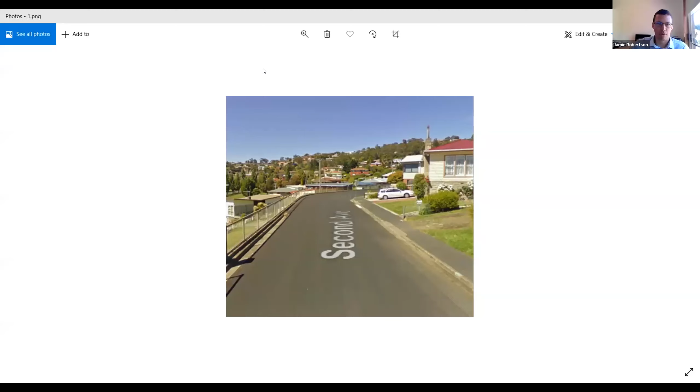I hope you can all see a photo there. Yep, that's good - you might want to zoom in a little bit there for us, Jamie. Yep, here we have 2nd Avenue in West Moonah.

We have a retaining wall here, Emily tells us, and there's about a 5-metre drop beyond that to a service road. There was an incident where a taxi driver was looking at his GPS and didn't take the bend, and went straight off. So Emily's question is, would you put in a pedestrian barrier or a road safety barrier?

I would suggest installing a road safety barrier here, which would serve the two purposes of containing vehicles and also highlighting the presence of that drop for pedestrians.

If you did put in a road safety barrier, it's going to need to be one with a bolt-down post, or it would need to be bolted to the side of that retaining wall. I'd suggest you would want to use a strong post guard fence system.

We've talked about proprietary and public domain guard fence products. Sometimes you might hear the terms strong post and weak post. The proprietary products are weak post systems, so the posts bend readily on impact.

Here, because of the relatively low speeds, we could get away with a semi-rigid system, a strong post system, which we could bolt down.

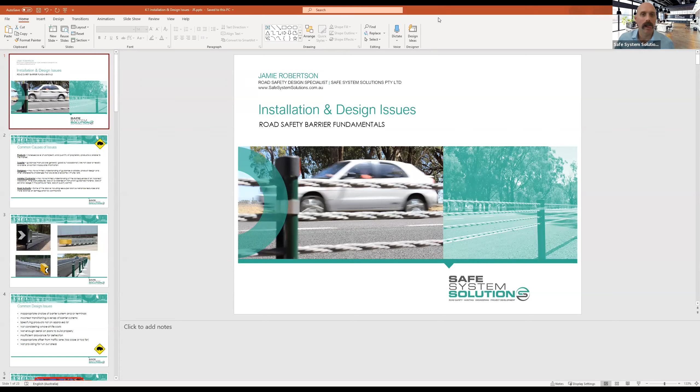Okay, yep, we're nearly there. Yeah, no, we're seeing it now. That's good. I got the right screen showing there, Ken. Perfect, Jamie, looking good, thank you.

So in the previous session, we talked a lot about the basics of design and the desirable things that we like to do in barrier design. In this session, we'll show you a lot of real world examples and situations where it's just not quite possible to get all those desirable things in place, and we have to make compromises.

There are a range of causes of the issues we encounter with barrier design and installation. Some relate to the products being used, particularly the newer proprietary products have a high number of parts and are quite complex to put together. Especially when a new product comes onto the market, we do see a lot of installation issues. The suppliers can perhaps take a little blame for that, especially in the early days of a particular product, their guidance may not be as thorough as it needs to be. These days though, we do see some pretty good product manuals available and even videos and the like to help installers install these products.

Designers sometimes may not understand the ins and outs of the products they're designing with. It does happen that designs are prepared without a designer visiting a site. There might be a desire to get a particular offset or use a particular flexible product, and I've seen it too many times where designs have been put on paper and a designer hasn't verified that it can actually work on site. So that really is the key first step to any barrier design.

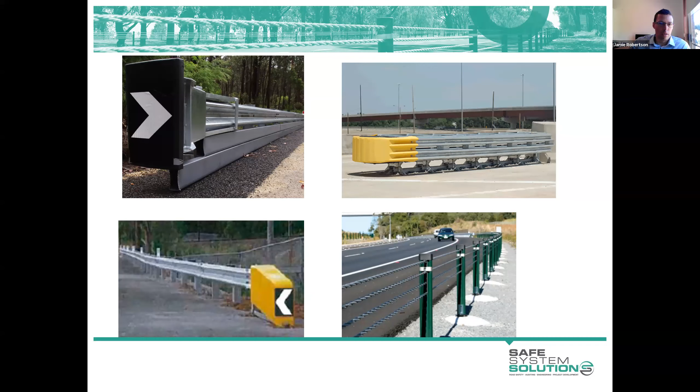Common design issues include inappropriate choice of barrier system. It might be that we have a desire to provide a flexible system, but we just don't have the luxury of the space to do that on site.

I won't read through those, I have photos of each of those things coming up shortly.

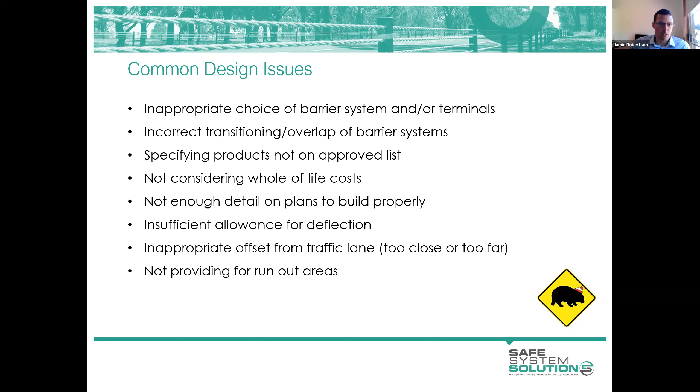Just on that one, sorry, getting that sort of run out area and the like could be a challenge. What are your thoughts there?

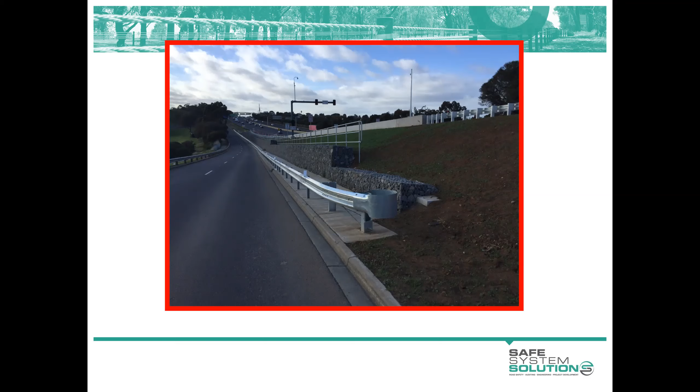Following up on that, Jamie, of the two methods of calculating length of need, the run out and the angle of departure method, which one's going to give us longer from that other side? The angle of departure method is going to give you a longer length, particularly at higher speeds. At lower speeds, the difference is not so great. I did mention that the run out length numbers have reduced significantly, so it generally gives us quite a bit shorter lengths, especially on those departure ends. Thank you.

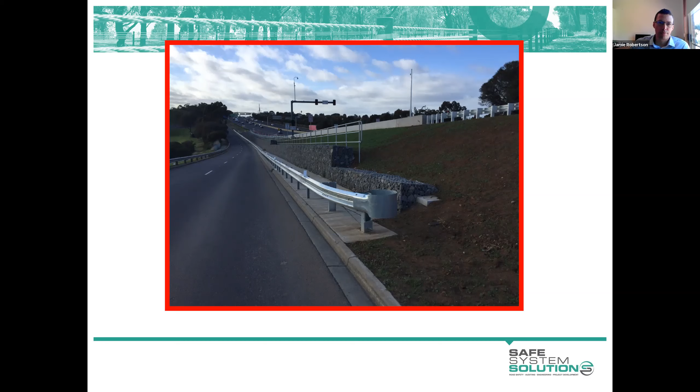I'm going to continue on that, because that's a question Lachlan came up with. Actually, Lachlan's got his hand up, so this is perfect. Pop that hand up again, Lachlan, because I'm going to let you ask your questions directly to Jamie.

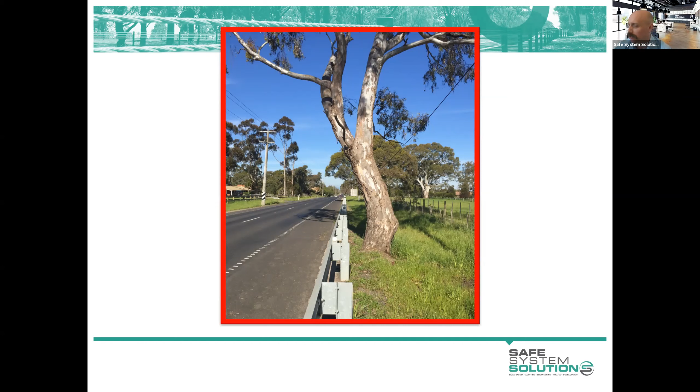Here we have a type B guard fence again, but it's located quite a long way from the edge of the traffic lane. It's beyond that 6 metres, which is now our desirable maximum offset. Between the edge of the traffic lane we've got curb, a batter slope which is nice and flat, probably drivable. Then we've got a table drain in front of the barrier and a change in grade. It's likely to affect a vehicle's trajectory before it hits that barrier. We have an increase in rollover risk because of the offset of the barrier from the edge of the road. So going forward, the preferred approach would be to locate your barrier somewhere up here.

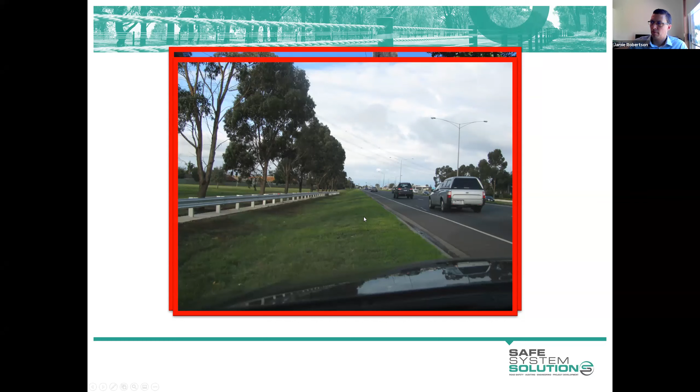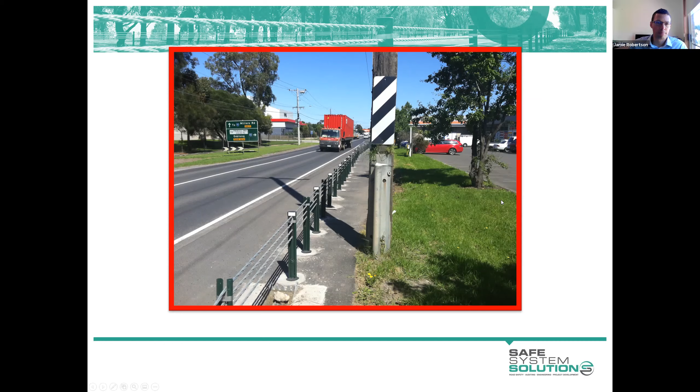Here we have a guard fence at the roadside that's shielding some of the trees you can see. There are certainly plenty of others that are exposed to errant vehicles. We certainly don't have the run out area that we'd like - our 18 metres by 6 metres in this area. You might notice we have a cut batter to the left of the image that runs out just before the start of the barrier. This is a common situation where we have a barrier start at the transition from cut to fill.

Desirably, this barrier would extend closer towards us to somewhere around here, but we perhaps can't extend it too much further because of this cut batter. But if it did extend to somewhere like here, it would shield a lot more of those trees, and we'd have a nicer run out area. Perhaps it's started where it has to provide a maintenance access point at this area here.

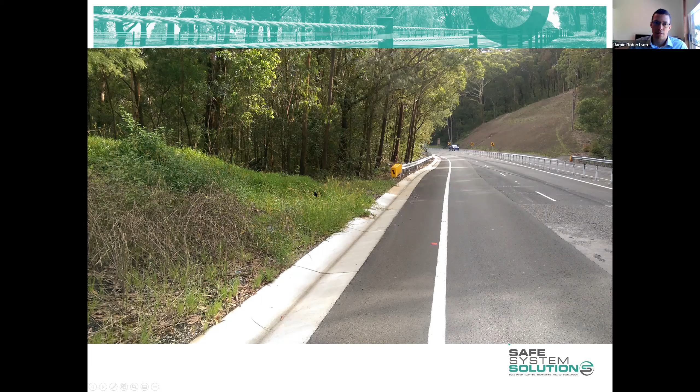Here we've got a barrier in a narrow flush median. It's an X-Tension median terminal, which is not a mash tested product, but as it stands, it's the only available median barrier terminal. So if you have a median situation where you need a median terminal, talk to the safe system engineering team, seek their advice. It's likely they will suggest you continue to use this product in the interim until we see a new median barrier system come onto the market.

On these projects, there's been a real desire to squeeze things up and narrow the median to as little as possible. This one's only 1.4 metres wide. The terminal is something like 800 mils wide, so you've got very little clearance on either side.

It's a project that's been progressively upgraded in stages. At the time this photo was taken, this was the first median terminal you would have encountered. Shortly after its installation, it was struck by a Coles truck and flattened. Interestingly, it's almost always trucks striking these median terminals, and a large reason for that is the amount of sway and the increased tracked width of a large truck.

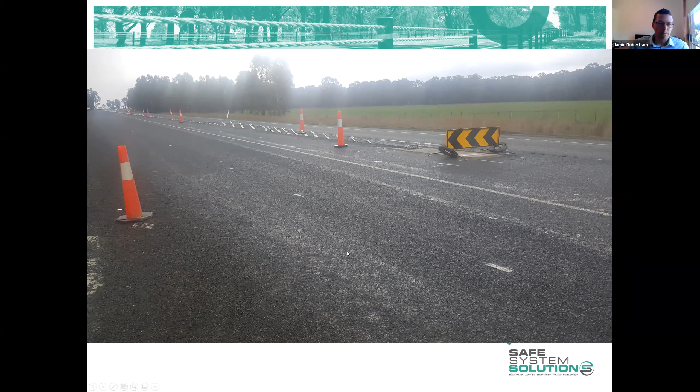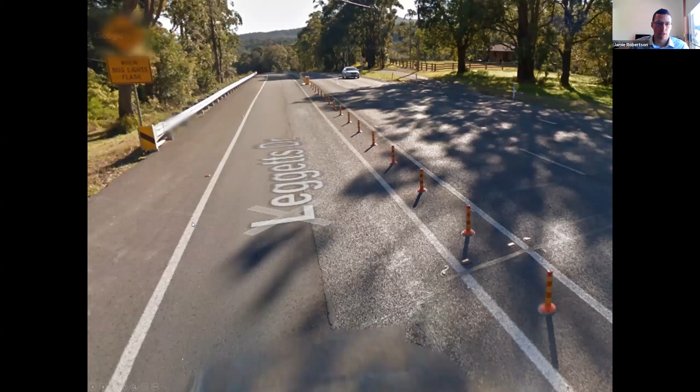But in the last year or two, Vic Roads has provided some really good guidance around delineating the starts of median barrier treatments in narrow flush medians, including detail around delineation. The preference is to widen or flare out the roadway in advance, or flare out the median in advance of those barriers, and to provide an island if you can.

Jamie, while you're on that photo, just a random question - over to the side there, you've got what looks like an ET2000 and a sign tucked inside it. Is that frangible galvanized steel post going to compromise that, or is it frangible and not really an issue at all? Probably not going to affect the performance, but we can't be sure. So the preference would be to keep any of those sort of objects outside of that run-out area, basically.

And there's that cut-off post. So a question on that - for surveillance officers and the like, people looking at these installations, they've cut that one off and you can see some oddness to it, but how would you tell if they were cut off without digging down? There are some telltale signs to keep your eyes out for. These are fabricated components - there are holes at strategic locations you can pick up, and depending on the system there might be little chinks in the side of posts to weaken it at strategic points. So it does depend on the system, and it might be that you couldn't tell unless you were there at the time whether it had been installed to the correct depth.

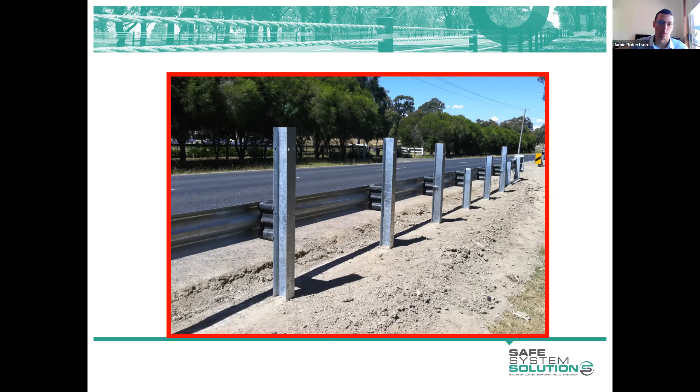Okay, let's keep moving on.

Here we've got the X350 terminal. Again, it's not a MASH accepted product, but there are a lot of them out on the network, and there are a handful of key issues you might encounter with this particular terminal. It has two cables running along the back, and in this instance you can see they're quite slack - there's no particular tension requirement in them. These cables anchor to the ground at this end of the terminal, and then at the other end they anchor again on the back of the rail. When the terminal is struck by a vehicle travelling from right to left, there's a locking bar inside the terminal head that grips against that cable, and the tension at that connection brings the vehicle gradually to a stop.

This one's obviously not as tight as it should be, and you can see it visibly sagging below the bottom of the rail. So that's the telltale sign—if you can see that sagging below the bottom of the rail, it's not what it should be.

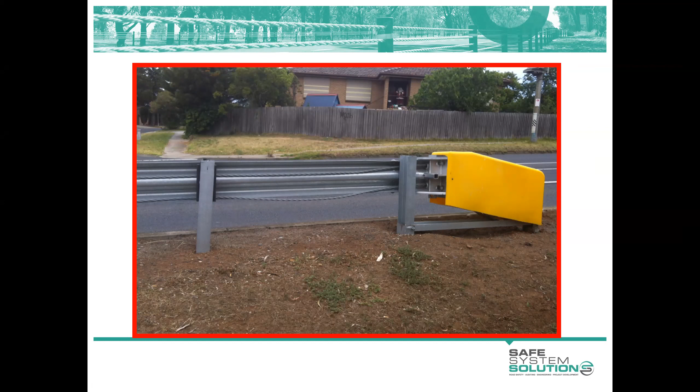We just got a comment questioning whether that's Santa in the background. So random comments and questions there, but we're not doing a Santa count, we're doing a Wally count. Good spotting.

Again with the X350, this piece of the terminal—this component here is called the slider unit. The idea with this particular barrier system is that when it's struck at the end, the rails—there's not a rigid connection between successive rails.

They slide one over the other as the vehicle is brought to a stop. This piece here, the angle bar, is intended to knock out these black blocks on the posts as the rails slide one over the other. This angle bar has been installed on the wrong side of that post and block. It should be over here, so this rail can push over this one and knock all the blocks out of the way as it goes. So that just goes to show the installer in this case didn't understand how that system works, and that's a very common issue with this particular product.

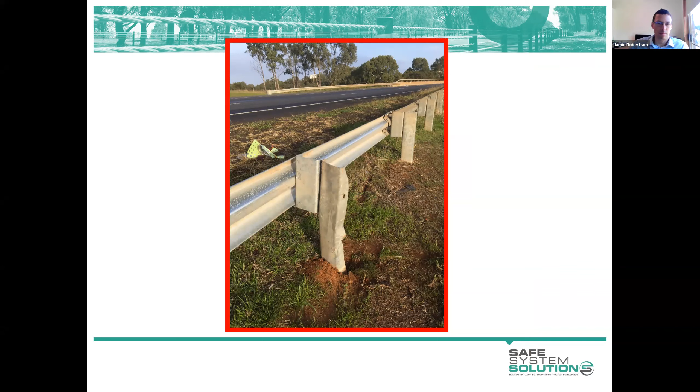This is a photo provided to me by Daniel Cassar, and he's very passionate about this one. This is a dodgy guard fence repair job. This is actually the site of a fatal crash where a four-wheel drive or an SUV penetrated the barrier and people were killed. The person charged with maintaining or repairing this barrier saw fit to just straighten out the posts at this location and stand the barrier back up. So that's a pretty ordinary effort when the barrier should have been replaced with new posts.

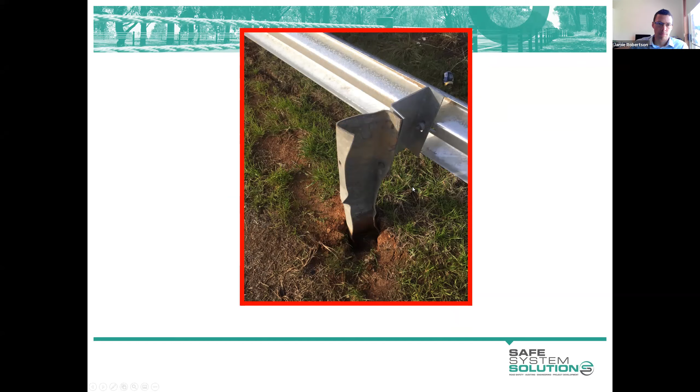So, W-beam hanging out of the gating terminal, not going through the extruder. I think that's pretty much right, isn't it? Lachlan just in first there, and a few others with some different ones. Some comments about not having a chevron at the front, but I think that's a New South Wales one—they don't use a chevron at the front, they use that line. Is that right?

That's right. This is probably the standard look of an ET2000. In Victoria, we use the motorcycle friendly cover with a black and white chevron on it, but it's one and the same terminal. With this terminal, and any extruder type terminal, the main issue you can find is that the rail isn't inside that extruder head. So the likelihood is that if that terminal was struck end on, the rail would spear out to the side rather than get pushed through the head and extruded out to the side. Lots of correct answers there—it's just Lachlan got it first.

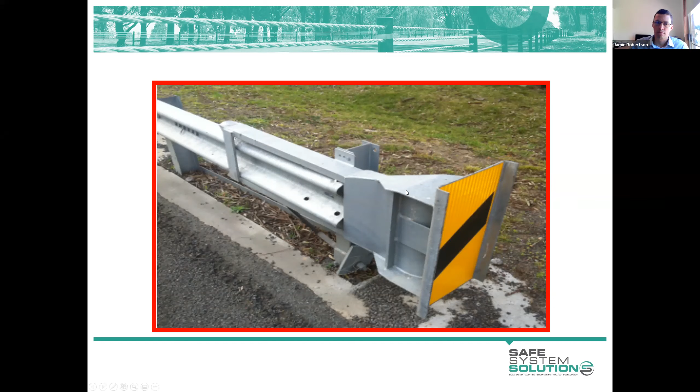We have a rub rail that's inappropriately terminated, or not terminated at all. We can install a little shroud on that to make it more forgiving in the event that someone, perhaps a motorcyclist sliding along the road, strikes it.

Here we have a terminal, an extruder type terminal, that's been concreted into the ground. So that's not going to budge when it's hit.

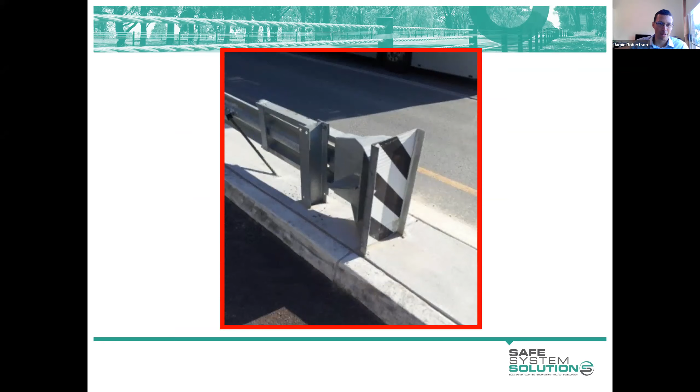Our guidelines say that the maximum number of blocks we should use on a guard fence is two. Here we're up to about five. Obviously we've got services in the mix, and the posts had to be installed well back from the rail position.

Will this perform well? Who knows? Maybe there's an increased likelihood that if a vehicle impacted that rail and the posts rotate back, the rail height will increase and it may not perform particularly well. Wherever possible, maximum number of blocks at 2. But again, this is a type B installation, which we're not going to see a lot of going forward.

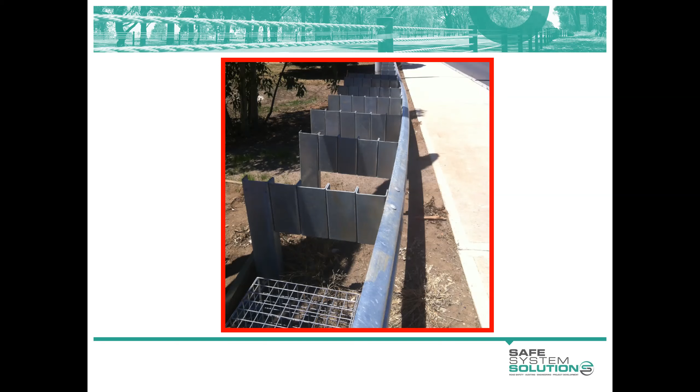What would some other options be there, Jamie? Because we've got a comment that's come in as well. Is that not the best that they could do in the situation with the services and the like? Yeah, we might be able to use a bolt down post, and the proprietary products generally have a bolt down option. So if we could create some sort of concrete footing and bolt our posts to that, that's subject to the depth of the services at that location.

And another alternative - it's a bit hard to tell from that picture what's happening. We've got a path there, perhaps our barrier at back of curb might have been an option there.

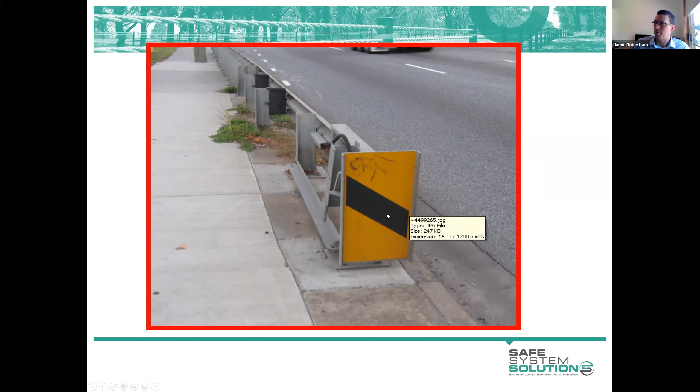Here's a bit of a dodgy install. Not quite sure what's happening here with this cable over the top. Yeah, pieces not connected. Not good.

Barrier height is one that comes up a bit. The height of barrier installations has increased in recent years. The standard height of guard fence increased a number of years ago by about 50 mil. You can see in this picture, this one's as low as 600 mil. All of the new wire rope products, the MASH wire ropes, have increased in height to ensure that they can contain the larger vehicles that they're now tested to.

So be mindful of barrier height. If you have a guard fence installation and you need to raise its height, you can use an Abraham block in the case of type B guard fence, and the suppliers of proprietary products have their own versions of that for their particular product as well. That's a little alternative to the standard block that can be fitted to existing posts to raise the height of the rail by something in the order of 100 to 200 mil.

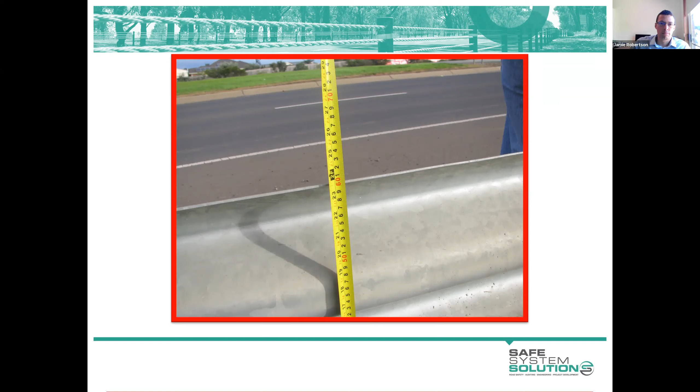This is a site in New South Wales that we investigated. It was the site of another fatal run-off-road crash where a vehicle penetrated the barrier. Again, it was a four-wheel drive or an SUV, and you can see that barrier looks particularly low, and that's at least in part due to the build-up of all this material in front of it. So we measured the height of that one, I think at perhaps even a little less than 600 mil, when it should have been more like 750.

Anyone spot the issue with this installation? Oh, this is a little bit of a more challenging one, I think. Let's see what comes in. Oh, Sam, straight off the bat. Oh, they're coming in thick and fast correctly. So curved terminal, I assume, is the one you want to point out there. That's the big one. Well done, Sam. That's your prize, and thanks to the others who have got it correct.

Any guardrail terminal must be installed perfectly straight to ensure that it will perform as it should. There are often tricky situations on curved roadways where it may not be easy to achieve that, or it might seem like the right thing to do to curve it, but we can't be sure of the performance of that terminal. So Jamie, you say that it can't be curved, but you talked about flaring. What's sort of the difference there?

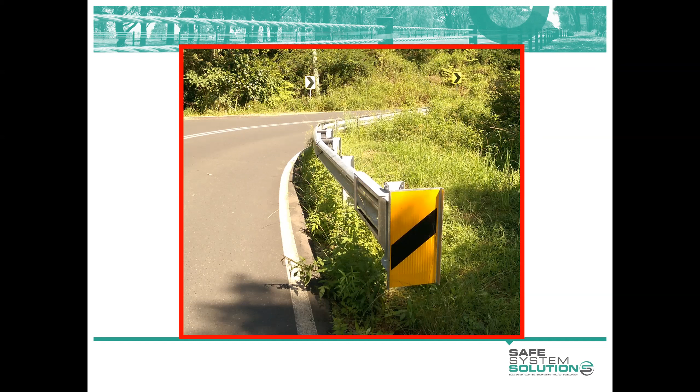So Jamie, questions come in. If you can't fit the straight terminal, is curving it like this the next best option, or?

Probably not. You might look to extend your barrier a little further, or terminate it in a slightly different location, to ensure that you've got that straight alignment.

I'll point out that this particular terminal is the test level 2 variant, which is appropriate for lower speeds up to 70 km/h, and it's quite a bit shorter. It's in the order of, well, the new MASH ones are something like 9 meters as opposed to 16 meters. So if you're on a curved roadway, chances are your speeds are not particularly high, and you might get away with this test level 2 variant, which should make it easier to achieve a straight terminal than using the longer version.

Look, I'd encourage you not to curve a terminal at all. If it's absolutely unavoidable for some reason, minimize the amount of curvature as much as possible.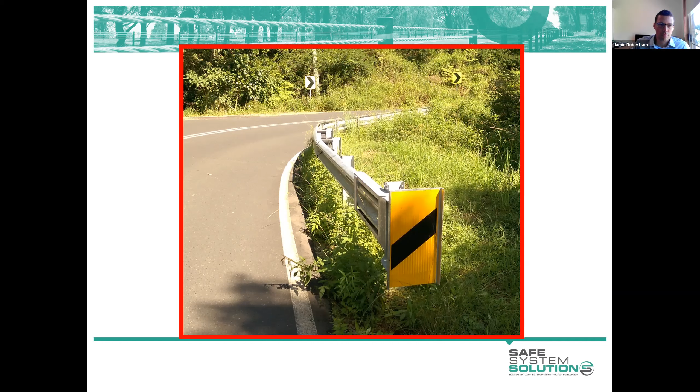This is the X350 terminal again, and this is looking down on the impact head. I'll point out again, this is a non-accepted product for future use, but there are a lot of them out there on the network. This is one of the issues that does commonly arise with this product.

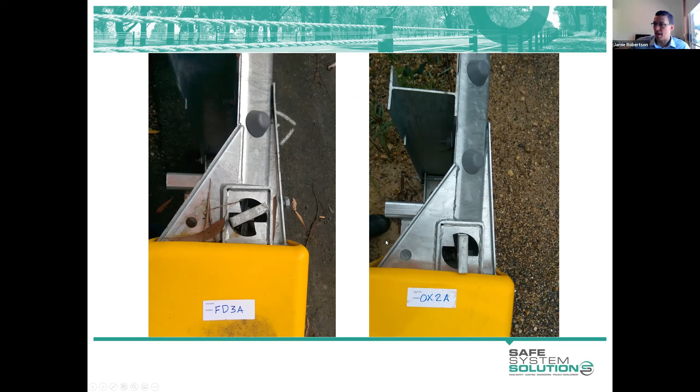Again, this is a smaller footing than we should have. I do encourage you to check the dimensions of the footing for the system you're using, and to be mindful of those on site if you're inspecting an installation. It's not uncommon for them to be installed to different sizes, and that might be because of some constraint on the site that means you can't install it in the way that you would want to.

Where that's the case, I encourage you to consult the product supplier. It may not be the case that you have to install the footing to the exact dimensions specified - the suppliers can help you by designing an alternative footing. It might be that you've got services at a particular depth that mean you can't install the footing as deep as you would like, so you might install a shallower footing that's wider and longer and has the same or greater mass and will still perform. So talk to your suppliers about that where you've got constraints like underground services.

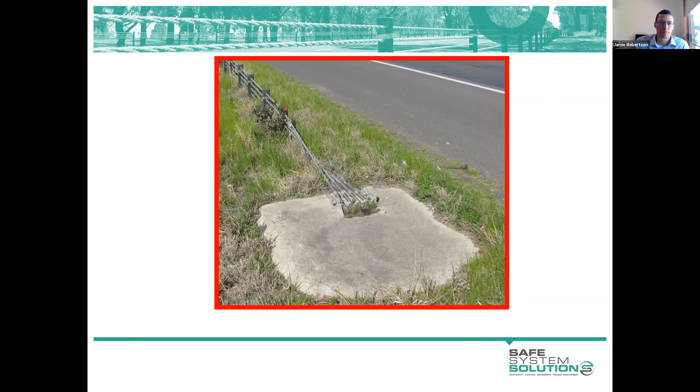This is a bad example of an intermediate terminal, or an overlap of terminals. It's a non-accepted product. This is an anchor point for a terminal, and this is another anchor point - there's a slight overlap between the two systems, with no space between them for deflection. Each of the suppliers provide a typical detail for what we call intermediate terminals, where successive barriers are overlapped, and this certainly isn't in accordance with those.

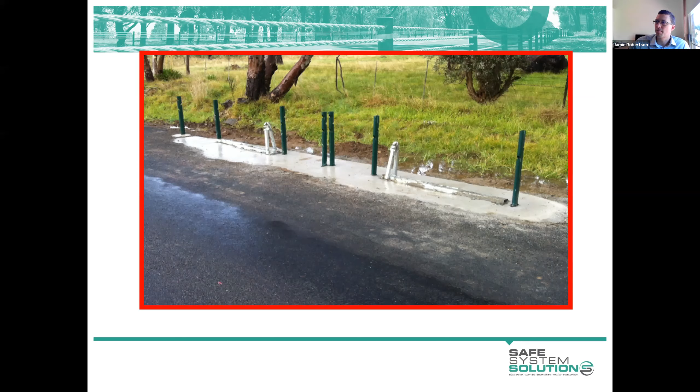For any wire rope terminal, the cable should be anchored centrally within the block. You can see here that these cables are off to the side of the block, which is relatively commonly done where you've got a wire rope behind curb. It's understandable that an installer would do that because they want to maintain a straight alignment rather than kink it away from the curb at the terminal. But this is not by the book. Within the anchor there is a reinforcement cage that requires a certain amount of cover, so it may not be the case that adequate cover is provided here.

That's right, we've got two different systems, good spotting. In the foreground we've got the old Brifen system, not to be confused with the new MASH Brifen system that's available, connecting to a Flexfence system. I'm not sure what happened there, whether they just had a few Brifen posts in the back of the ute or what happened, but certainly we shouldn't be mixing and matching systems. The performance, particularly at this transition point, is unknown.

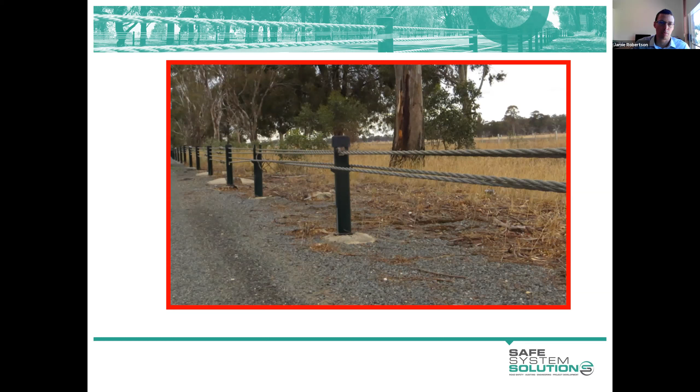Yeah, that's right. And in general we don't like to nominate particular systems because the different competing systems are all crash tested to the same requirements. But one instance where we might want to is particularly in more isolated locations, where we have a certain system in use and we'd like to continue to use the same one. Also, Evan did mention in his presentation that the acceptance at a jurisdictional level of additional products - one of the factors is how many of these have we got already that achieve the purpose that this new one is coming along for. So it's a little bit factored in, but I do tend to agree with that, and it is just a constant challenge to keep up to date with the new systems, the alterations, what's happening with different existing systems.

So you've got to really keep on your game here and read those road design notes as they come out, and keep checking the jurisdictional websites for what's current. Partly that was why we had that assignment for you, where you took just one product to go through that process - well, it should be sort of the same with other products as you go.

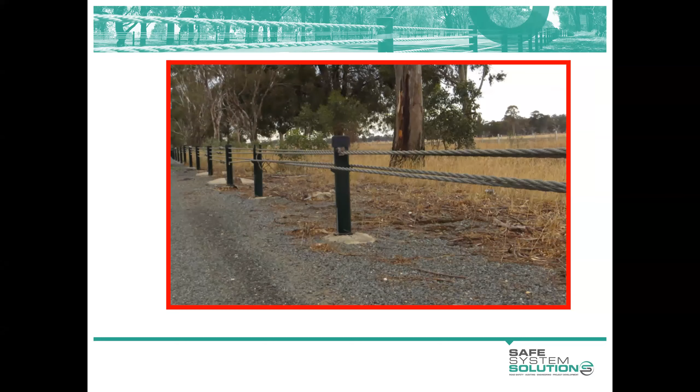Wire rope foundation at a terminal. This little piece here, this little fin, is basically an installation guide. It should be installed flush and level with the concrete surface. Here it's obviously protruding quite a bit, and it's angled back such that these teeth are near vertical, and there's an increased likelihood that these cables might pop out the top when the system's impacted. So desirably this whole anchor bracket would be rotated down so that fin is horizontal.

Wire rope located right at the hinge point, pretty much. Two issues there: we're not containing any of the deflection of this system within the verge, so there's a likelihood that an impacting vehicle will end up going under the barrier and coming to grief. We also have very little structural support for those posts, and you can see already that there's a bit of erosion happening around those posts.

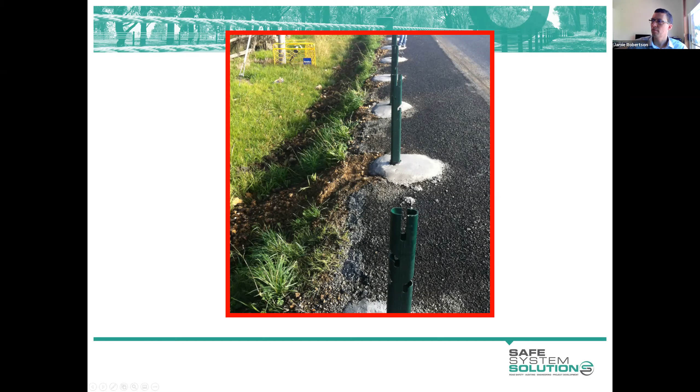There's a bit of a makeshift attempt to repair a damaged barrier that's certainly not going to hold up under any sort of impact.

This is a little further up the road from the photo I showed with the wire ropes at the hinge point. Again, wire rope at the hinge point.

The drainage here, some widening took place. Perhaps there was inadequate compaction. There was a particularly heavy rainfall event after these works were completed, so it was a bit of a perfect storm that resulted in a lot of undermining of the existing barrier systems. You can see here the block is protruding quite a bit, and we can't be sure that it will perform as intended.

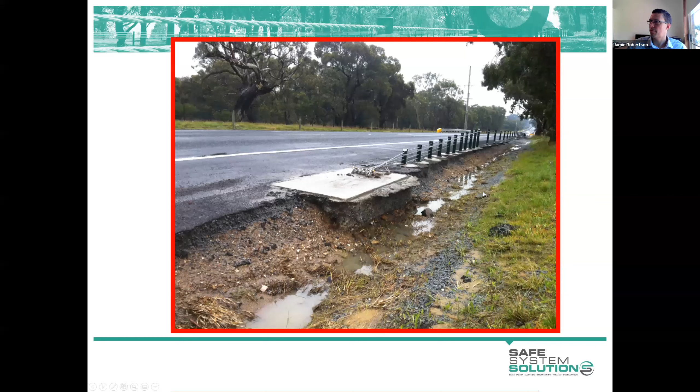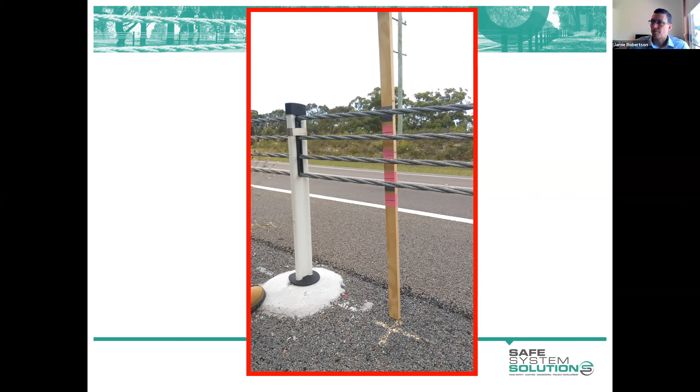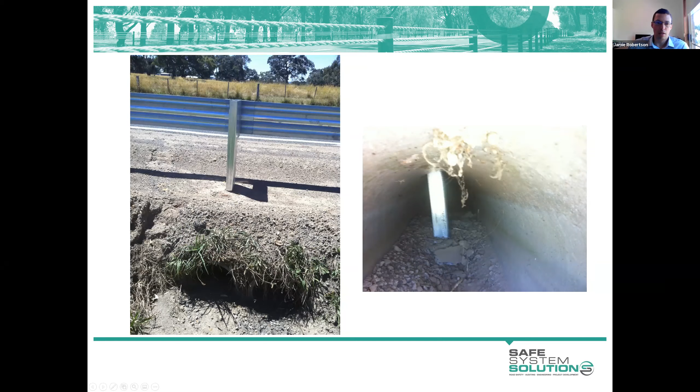In the case of a bigger culvert like this, you might want to omit a post and straddle over the whole thing if you can, if it's not particularly wide. But if you're doing that, you need to think about compensating for deflection at that location by maybe double nesting the system if it's a type B. Double nesting is sitting one rail over the top of another, which we can do with type B installations, not with the proprietary products.

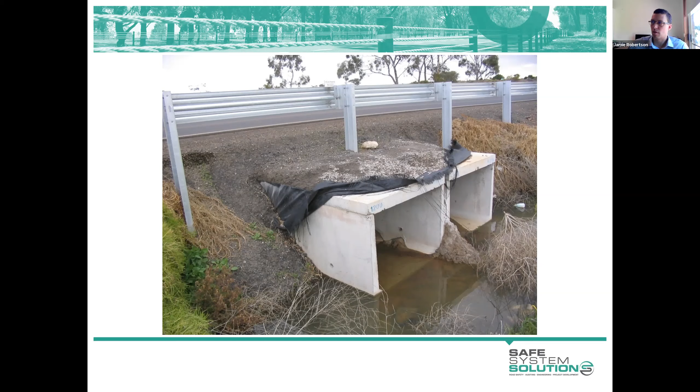The other thing we can do is close up our post spacings before and after that culvert to reduce its deflection. So you can see here we've got a culvert or a bank of culverts that we've straddled. If you look very closely, you'll see that this rail is double nested over this length to stiffen it up, and obviously we've got those reduced post spacings. So by doing that, we've sort of compensated for omitting that post in terms of deflection.

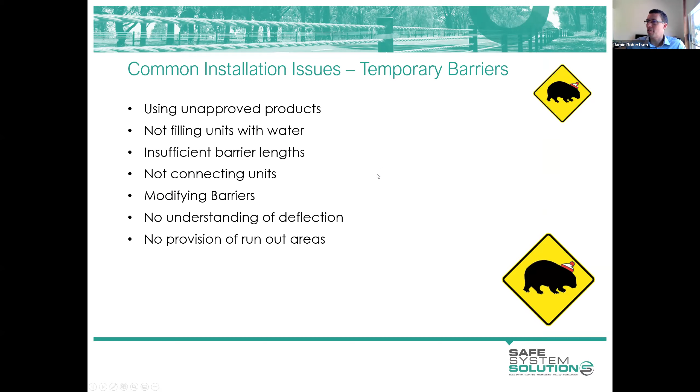Temporary barriers present a different list of challenges, and a lot of them depend on the particular system that you're using, the connections between them, whether there's water or not in the appropriate units, and so on. I'll show you some examples.

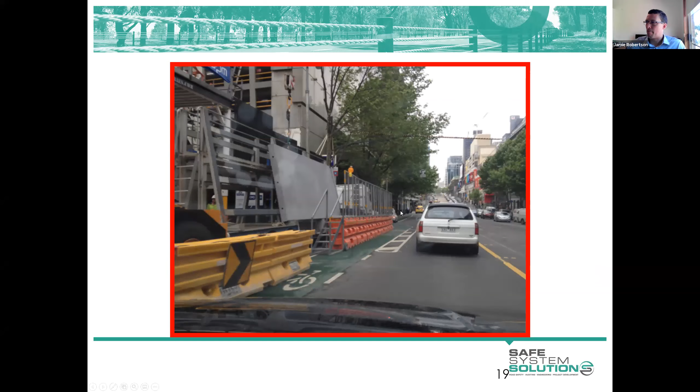Sometimes we see add-ons to the top of barriers, screens to stop debris, and the like. This is not an accepted configuration and should be avoided. Use the barrier for the purpose of shielding the roadside, not for other purposes.

Here we have a temporary barrier sitting at the side of the road with an exposed end that's a hazard to an errant vehicle. No terminal applied there.

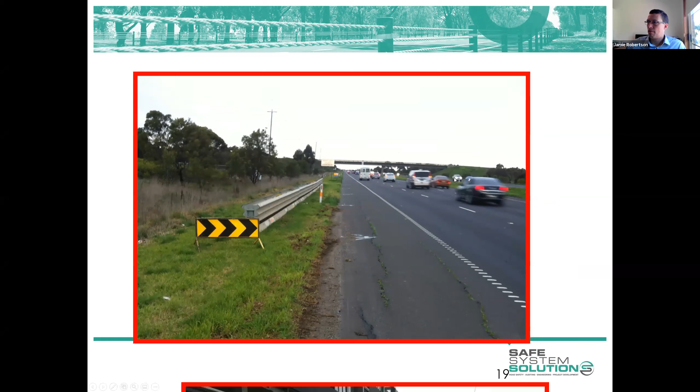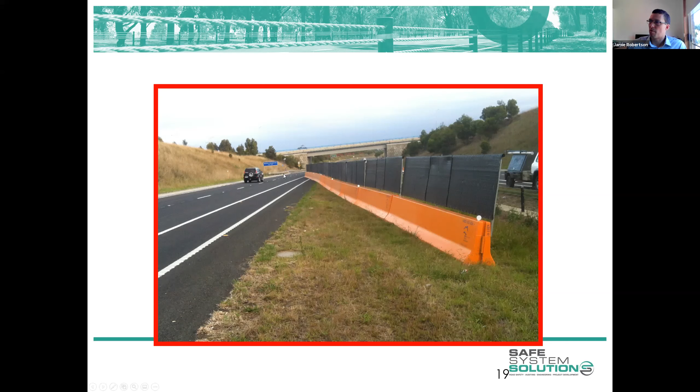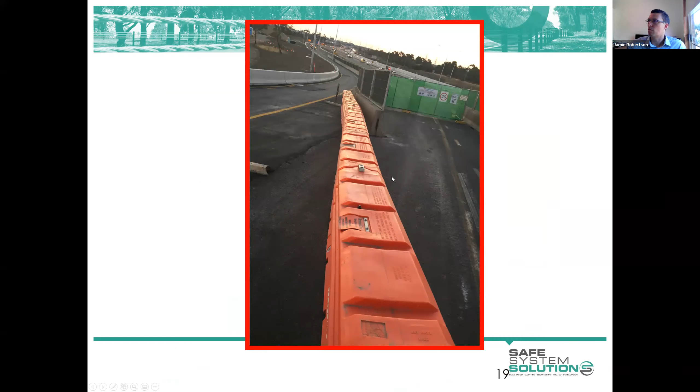This system here sitting in front of concrete is likely to deflect if a vehicle strikes upstream of that concrete, and perhaps still present a snagging hazard at the concrete there.

Another exposed end of a concrete temporary barrier, highly constrained location, not the space to put on an appropriate end treatment, and in an attempt to do something, a couple of energy absorbing bollards have been put in front. Credit for doing something, but maybe the locations of those could be improved a little bit. Maybe push one over here to better shield that end.

I suppose we should cover what that energy absorbing bollard is for those who may not be familiar with them. They're not just a concreted-in bollard, are they? They're not. They have...

It's like a cartridge, isn't it? Yeah, they have a cartridge beneath the ground that's sort of sacrificial. When they're struck, there's scope for that bollard to rotate about its base within that cartridge. So they do provide some ability to contain errant vehicles - they are a road safety device or road safety barrier of sorts.

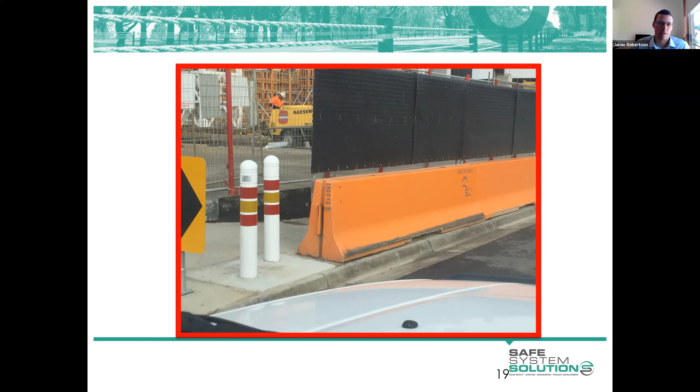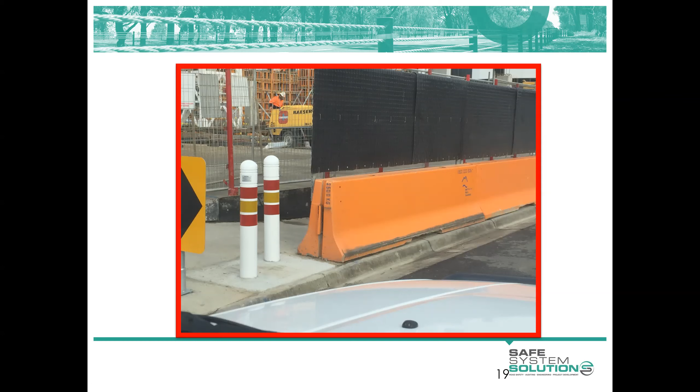I have seen in the latest Victorian road design note some other variations on these short end things. I don't know if you're going to cover that. I didn't have any more on that, Ken. No? Okay, I might bring that up - I'll dig it out and pop it up if we get time. But we've got a good few live examples to cover after you get through these.

Temporary barrier here between the traffic lane and a pedestrian walkway. Remember that these things deflect quite a bit when struck, and would certainly deflect into that pedestrian area - as has happened here. Fortunately there were no pedestrians in that area when that was struck, but there is potential for that to happen. You need to be mindful of not encouraging pedestrian activity within the deflection zones of these systems.

That's a bit of a mishmash of different products and systems. We've got a permanent, sort of a variation of an ET2000 terminal tacked onto a temporary concrete barrier, and a timber sort of debris or gawk screen on top. That's a real mix of things that's serving a purpose, but we can't be sure if that will perform well from a road safety point of view if it's struck end on.

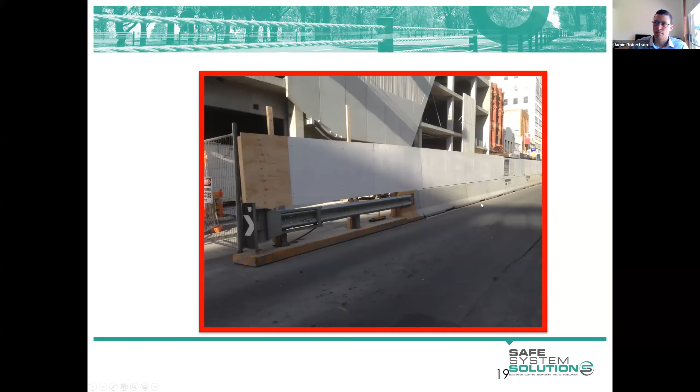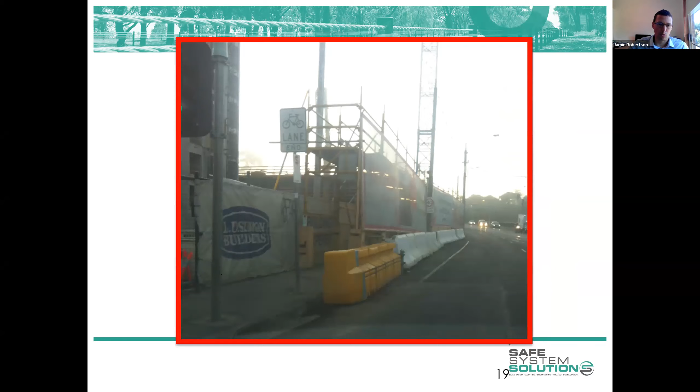No approach length or run-out length provided in advance of that scaffold. Desirably, that barrier would extend quite a bit further towards us to adequately shield that work area. As with permanent systems, we need to be mindful of providing run-out areas at temporary systems.

Scaffold connected directly to a temporary system again - that's a no-no. That barrier system at face value, from this angle, I can't fault it. But from a different angle, you can see the barrier is pretty much right at the top of that vertical drop. No space has been allowed there for deflection, and an impacting vehicle is likely to push the barrier over the edge and end up over the edge itself.

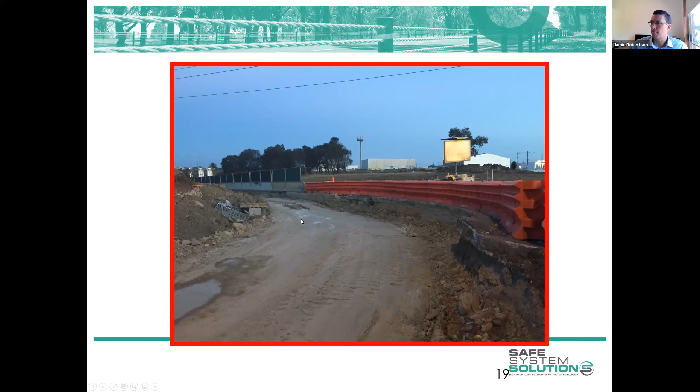So there are a few things happening to try and reduce the incidence of installation issues, in particular, and design issues. Certificates of compliance - that's a system introduced in 2012 that required suppliers of proprietary products to warrant their products have been installed correctly. The way they've gone about things has evolved and improved over time, with great systems and apps where photos are taken of particular points of interest of each terminal - that's where most issues have happened with proprietary terminals - but also the longitudinal barriers need to be assessed to ensure they've been installed in accordance with the supplier's requirements.

National Safety Barrier Industry Accreditation - there's an accreditation project in the pipeline that'll be run by a UK company called Lantra. Through that program, designers, installers and maintainers of barrier systems will need to be accredited to install products, and they'll need specific accreditation for each of the proprietary products if they're installing them. So stay tuned for that. There are a number of different levels of training and accreditation, right from labourer level through to lead installer and also for designers.

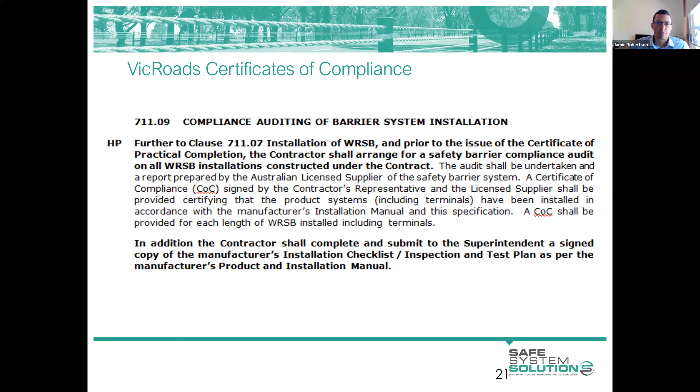So lots of good reference tools out there. VicRoads has lots of standard drawings and design guidance, which we've stepped through over the last week. They're your primary references along with the Austroads guide from a design point of view.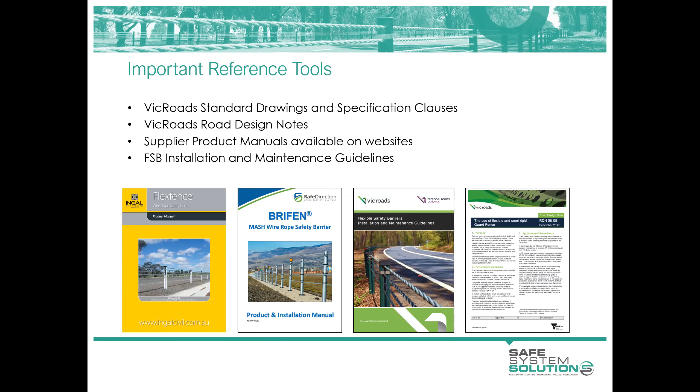Also got some images there of product manuals that the suppliers of proprietary products put out. You can find them at their respective websites. They don't include everything - there's often some additional crash testing and the like that the suppliers have carried out, and they don't publish all of those results.

Things around deflections that reduce post spacings, or speeds other than the typical crash test conditions - if you've got a particular location that's constrained, I encourage you to talk to the suppliers and get their views. They may be able to give you some additional guidance. If you've got limited depth to play with and need to provide a wire rope footing that's shallower than standard, talk to them. If you've got not enough room for deflection, all these types of things - get in touch with your supplier.

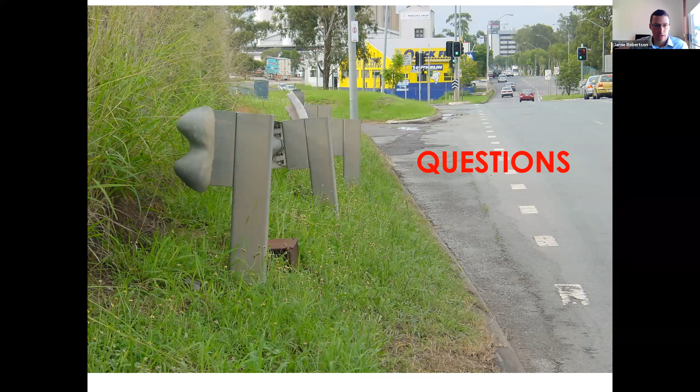One of the questions was around these temporary barrier systems and the deflection into pedestrian areas, where you showed those couple of photos. Would it be better not to have a barrier system in those situations if you've got pedestrians behind it, or what's the deal there? Yeah, good question - it's another one of those cases of is it better than doing nothing. The ideal situation would be to designate an area that pedestrians aren't to go in. How you achieve that is probably a case-by-case situation - have the pedestrians walk some distance away from the barrier. But as we find, it's typically those really constrained locations where an attempt is made to do something, and it probably is better than doing nothing.

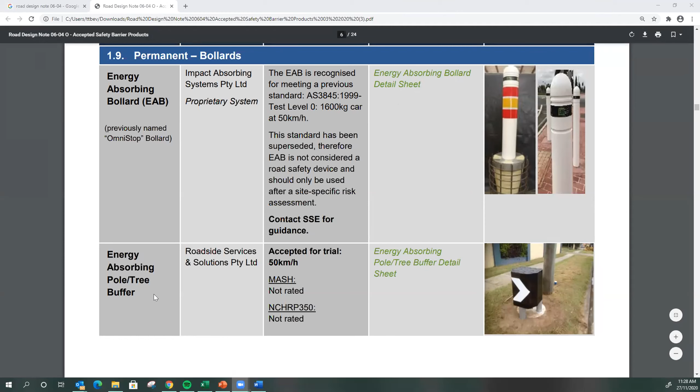I was just looking at that existing road design note, and added this thing, which seems to be another option accepted for trial, the pole tree buffer. Something to keep in mind, and it's a good reminder. There's also the energy absorbing bollard, but it's a reminder to always look at that road design note because new things pop in there at different points in time. So always download the one from the website.

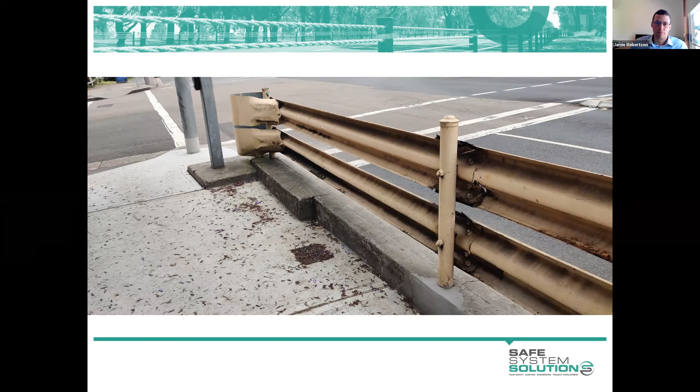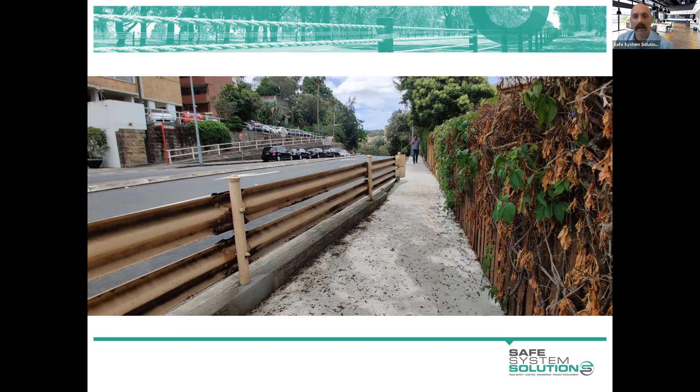Yeah, each jurisdiction typically has a number of different options and standard drawings for fence types. You'd need to be mindful that your fence didn't have horizontal members that could spear into an impacting vehicle. Some sort of weld mesh fence would be typical. Very good. So again, there'd be a bit more work to be done in understanding the context and some design work.

The barrier solution I'd suggest would be a flexible W-beam, because they can be located particularly close to the hinge point, only about 300 mil, and the system width is quite narrow as well. So you'd be locating that barrier as close to the hinge point as you can, say 300 mil.

Because of the drop, you'd want to think about installing longer posts to ensure adequate lateral support to the posts. And are those longer posts available off the shelf? They are, yeah. I believe each of the suppliers of proprietary products has a longer post variant for the flexible W-beam products.

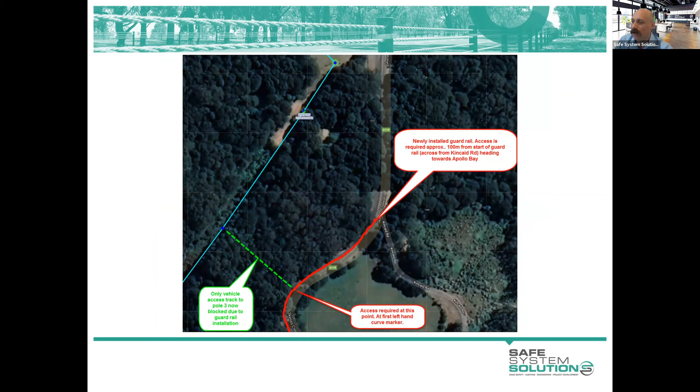So what do we got here? We're down Skenes Creek Road,

and we've got some newly installed barrier system. And if I remember correctly, and Jamie, you'll remember, there's access required at this point up here to get to something. I'm not sure what.

Yeah, there supposedly is an access point that needs to be maintained at this location to access a power pole that's approximately 100 metres through the bush.

So firstly, it amazes me that any sort of vehicle would be able to get through there, but on the assumption that we do need to provide an opening, there's not a lot you can do. Basically, you're going to need to create an opening with terminals on either side of an appropriate width that can accommodate the swept paths of any vehicle that needs to turn in there.

As part of doing that, I'd suggest that you flare the downstream barrier. So this, thinking about the direction of travel closest to the barrier, flare the downstream... Oh, I missed that. Yeah, so keep talking, Jamie. So for traffic in the lane adjacent to the barrier, flare the terminal on the downstream side so that it's somewhat shielded by the upstream barrier.

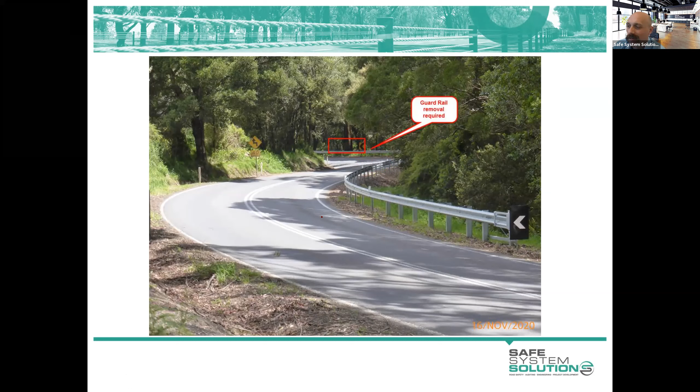Yeah, that's going to be a challenge. What do we got? This one just came in from the Lilydale, Mount Evelyn area, I think, and it was just... I think now I can't even remember who popped this in, but feel free to unmute yourself.

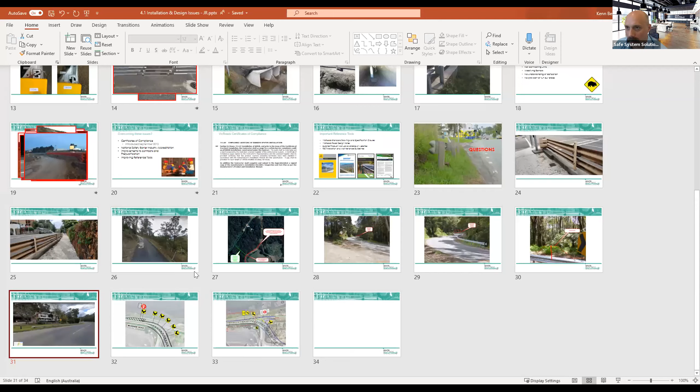I'm actually just going to go to the street view on that one, I think, instead of... sorry, bear with me, Jamie. I just want to... No, I don't have the street view of it up and running. So we'll go back to that.

It's a replacement, I believe, was the requirement, and we've got some significant services in the area. Any comments on that? So this is just the exit of a roundabout.

Okay, I can see that the terminal is a non-accepted product, so you'd want to look to install a grate. If it's the departure from a roundabout, your speeds are going to be relatively low. You'd get away with that TL2.

I can see we've got barrier curb at play there too. So by the book, we should be locating that rail in line with the face of the curb rather than some distance behind. It looks like the barrier might be just located a little behind. The trade-off with that is that it can be more prone to nuisance impacts. But locating it in line with the curb is about minimising the likelihood of someone vaulting over the barrier.

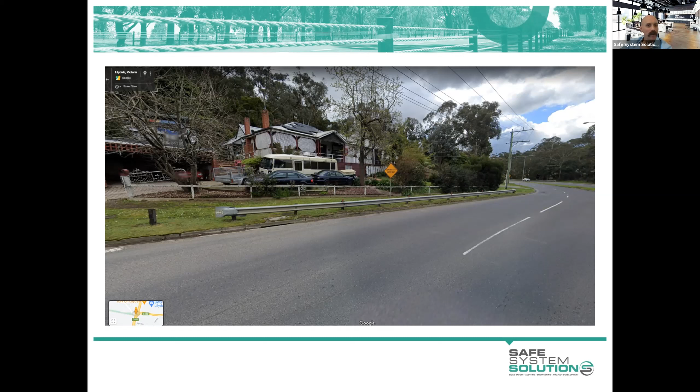So Matthew, you should be able to unmute yourself now. Sorry, I was a little slow on finding you there. If you click unmute, you can just have a chat if there's something you wanted to add. Hopefully you can unmute yourself. Hi, can you hear me? Yes, loud and clear.

So when this barrier got hit, there's about that second post in was a 2 metre diameter Melbourne Water pipe running down from Yarra Ranges. And to just try and fit it back, like the new terminal, which are sort of 15 metres long, this angle doesn't really show it, but it's on a bit of an angle. And so just to achieve that straight line, the other issue was at the time there was no base plate variant for the new terminals from the X350.

Now, is Google coming up there, Jamie, or are you still seeing that? Yeah, I've got Google now. All right, let's have a bit of a look from over here. This might help us out a little bit, I think, Matthew. Is that you've got big service issues in here, eh? Yeah. Okay, Jamie, I'll well, go back.

My question is, does the barrier need to extend as far as it does? There's obviously a power pole further along that it would be nice to shield. I wonder why that barrier is there, if there's been someone sort of speared off the back of the curve and gone through the fence there, but there are no other obvious hazards.

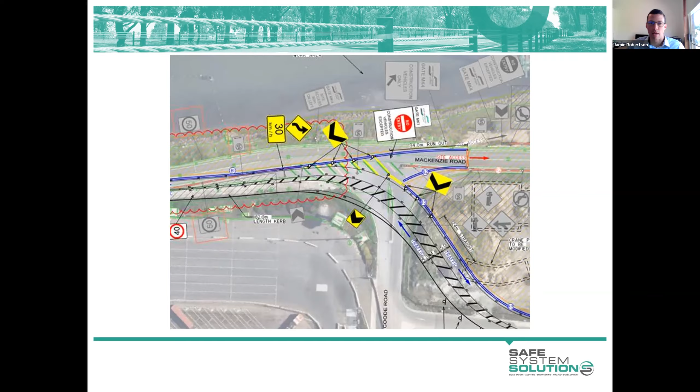Yeah, look, I'm certainly not opposed to barriers in most cases. 60 K's really is that grey area. We know that a head-on crash with another vehicle of the same mass, or with something like a pole, at up to 70 k's per hour is unlikely to lead to a serious outcome. There is, of course, opportunity for side impact crashes, which at lower speeds are more of an issue.

So 60 k's per hour, look, it depends on your location. If it's a new access and we're perhaps widening the road to provide a right turn treatment or something like that, and you've got power poles that are closer to the road as a result, that's a common situation. So you're increasing the risk presented by some roadside hazards. I can understand wanting to mitigate that risk.

An example is boulevards, tree-lined divided roads in 60 kilometres per hour. VicRoads guidance says we don't require barriers, but at 70 k's per hour, I think we do. So look, yeah, 60 k's per hour is probably a bit of a grey area where typically we don't seek to provide barriers.